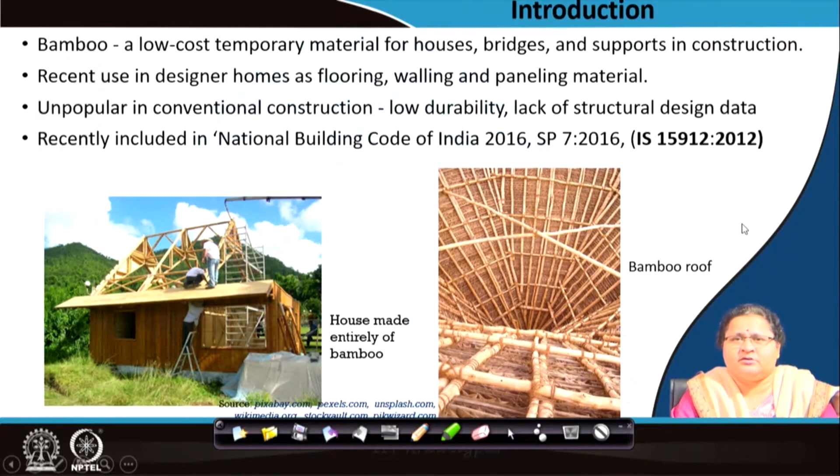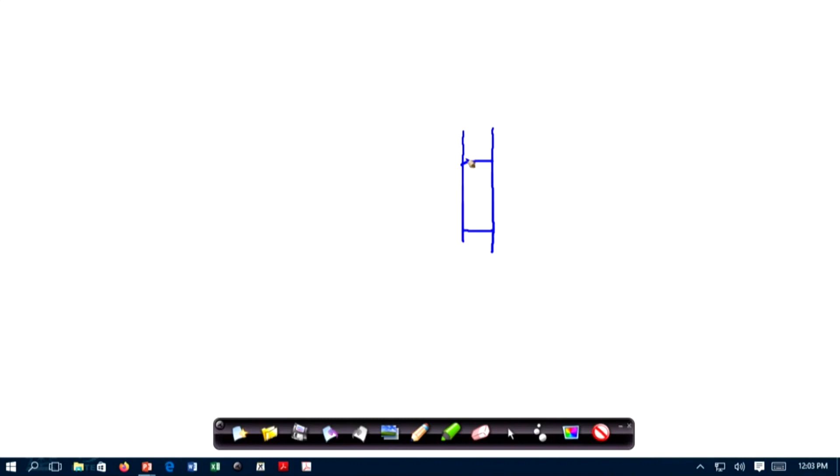So, what does it have? It has internodes and, in the transverse direction, nodes which actually act as stiffeners. So, at a regular interval it has a stiffener kind of thing which gives it support. If you see the bamboo like this, inside here you cannot penetrate further. This is closing, this is connecting. Otherwise it is a hollow section; in section it is hollow. But at these points, these are like ridges.

The bamboo culm is the tubular structure consisting essentially of its nodes and internodes. In the internodes, the cells are axially oriented, similar to wood fiber. The fibers are in the longitudinal direction and the nodes are restraining it in the transverse direction. The disposition of the nodes and the wall thickness of the bamboo are significant in imparting strength to bamboo against bending and crushing.

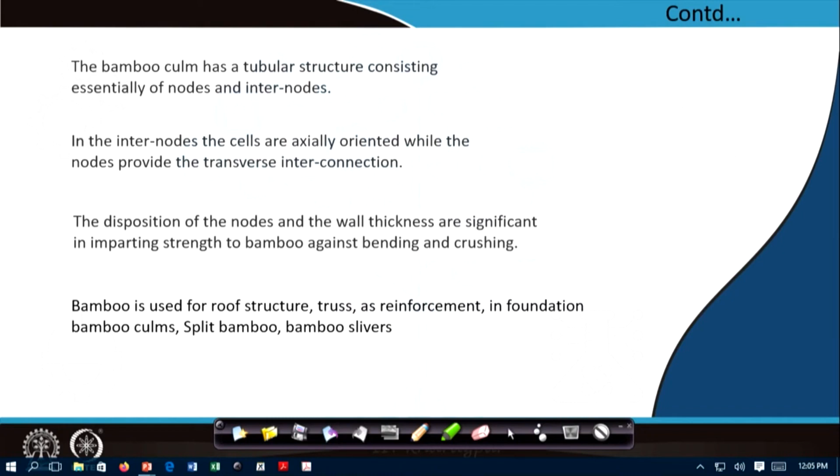Hence, it is suitable as a spanning material. Bamboo can be used as a truss, for roof holding, framework, and tiled roofs. Bamboo can go as a continuous beam member in foundations, and by splitting it, you can make it usable for giving strength.

So, bamboo splits half culms. You can split it in the longitudinal direction. So, it needs proper workmanship. So, you can actually slice it into two halves. I will come to some pictures.

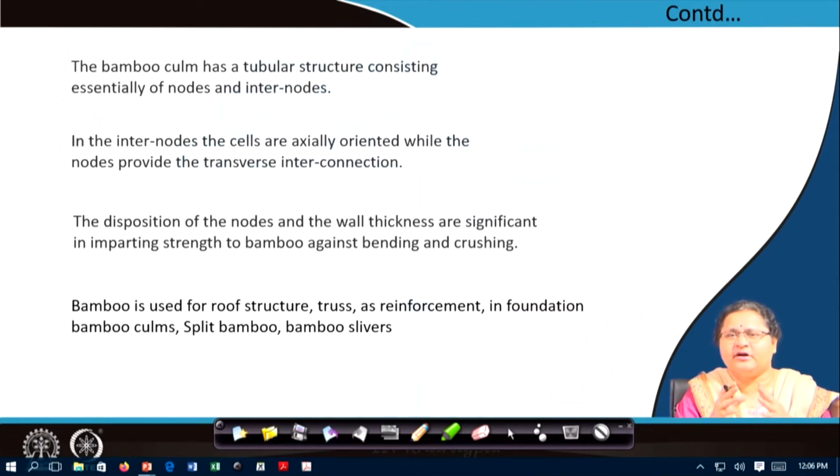And you can slice it further to get slivers. Those are also quite rigid, quite strong, and they can bend. You can make a wall with it, the support system within a wall with it. These are called bamboo slivers. So, after knowing these terminologies, let us see what are the advantages of it.

As I told you, it grows in the longer direction. It is a fast growing grass. It grows 30 centimeters, that means 1 foot, to 1 meter in one day. Extremely strong, natural fiber. Obviously, being natural, it has all the disadvantages like wood, that is, it may be affected by termites, it can absorb water, and you have to check those.

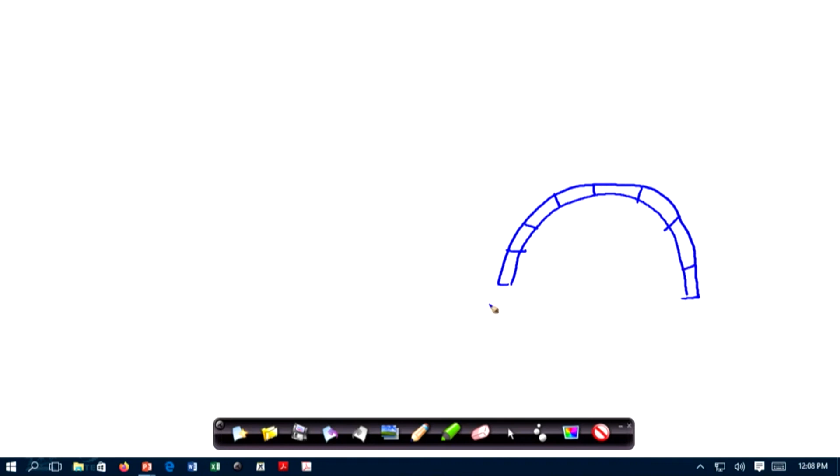So, if you want to make a bamboo arch, you can actually make it by training it. You can create such kind of arch just by giving it a way to grow in this direction and allow it to grow in this direction. After it gets matured, you can cut it and use it for your purpose. So, walls, arches can be made with the help of trained bamboo.

It is a shock absorber, particularly useful for earthquake prone areas. And finally, the most advantage is it is growing, it is a tropical grass, it grows much in number, light in weight, hence it is cost effective. You see, any kind of temporary structure which till date crops up is all made of bamboo. Any festival pandals, any fair kiosks, you will see the extensive use of bamboo.

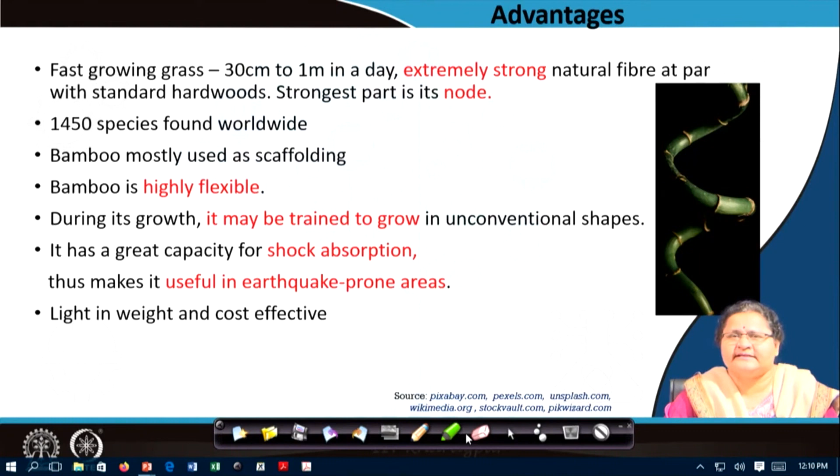As it is light in weight, you can carry it for distances by human carts and they can be transported. You use it as props, for holding, as scaffolding. So, these are the major advantages of it. Now, let us come to the limitations. You can see the red bullet points: joining techniques, flammability, lack of design guidance and codification.

So, traditional joints exist, but they are structurally not efficient, and that is why not put into code, because who takes the responsibility? So, proper joining techniques were to be developed, which are now being developed or researched. Flammability, yes, similar to wood, bamboo is also not fire resistant, they are highly flammable, and you have to either treat it with proper paint or you have to embed it so that it is not exposed to fire, and then only you can use it.

And coming to the last point, it does not have proper codes to be followed as a structural member. Though it is equivalent to wood, it has not come so much into the codes because there is not much design guidance. Embedded bamboo, that is bamboo as a reinforcement, has been started nowadays. Researches are being made, it is being embedded to replace iron rods.

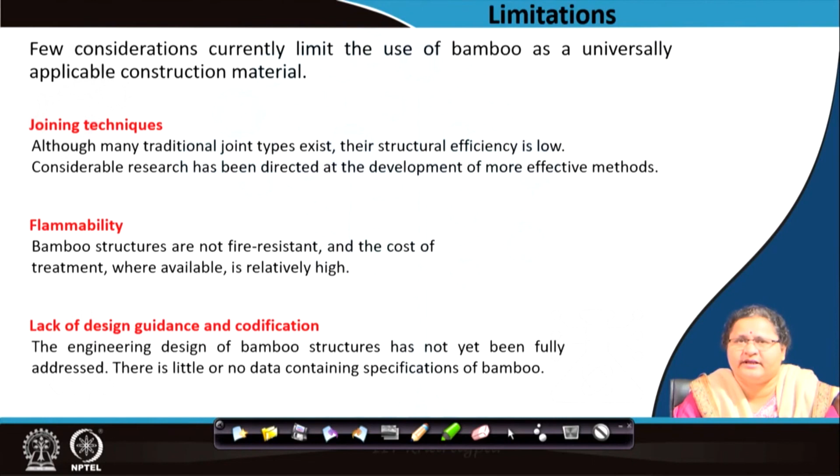Yes, the span may be limited, you cannot go longer. So, lack of guidance has restricted its codification, but yes, researchers are working on it to bring it to the forefront of building construction. So, let us see some joints.

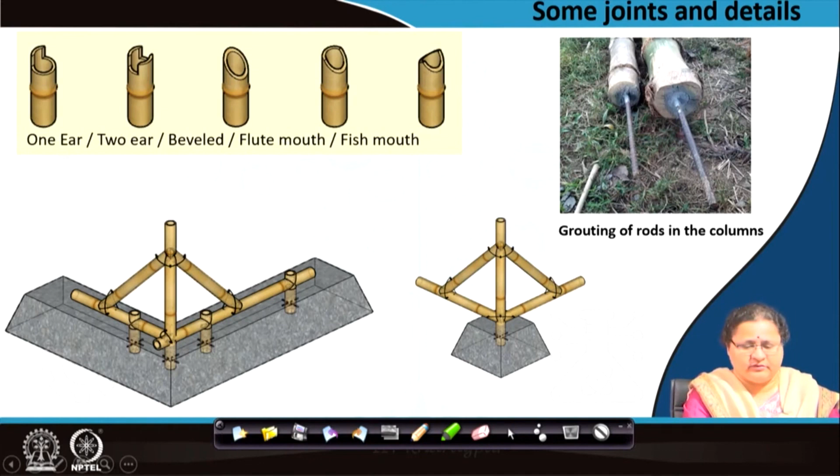These are some cuttings. You can see on the upper side a number of cuttings: 1 ear, 2 ear, bevel that is played at 45 degree, flute like. So, one side is half at the same level, that is a horizontal level, and part of it is beveled, and this one is the most used, which is called fish mouth. So, this is giving a circular profile which can, you can see, sit on top of another

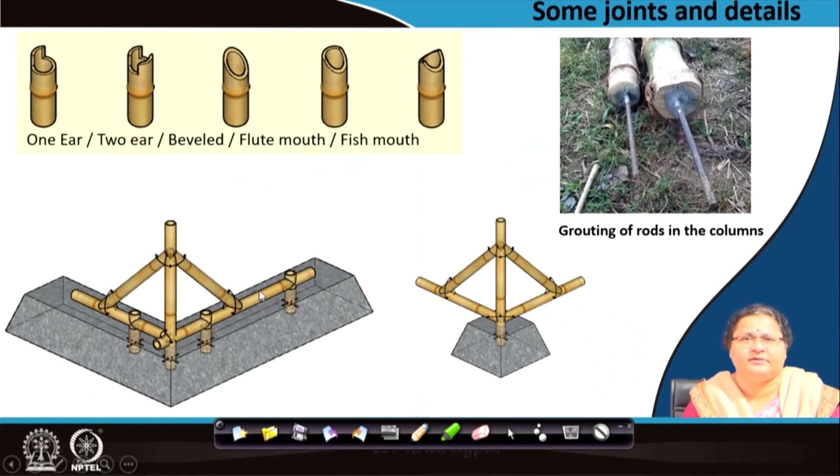member. So, these are composite bamboo concrete foundations. This is a single foundation and this is a strip footing. So, this is a continuous footing that is in the foundation. You can see at the edge or the corner where it is going to take the load, here it is strengthened by more members. So, this is the continuous member, and you see the cuttings are being done.

Now, how to fix it? You see the grouting of rods in the column. You can see reinforcement rod here that can go and get embedded inside the concrete. So, these are details being developed. Architect Laurent Fournier works in Kolkata area, where he has developed this kind of grouting methods. He has made cold storage in the rural area with bamboo. So, experimentations are being done. Let us see some more.

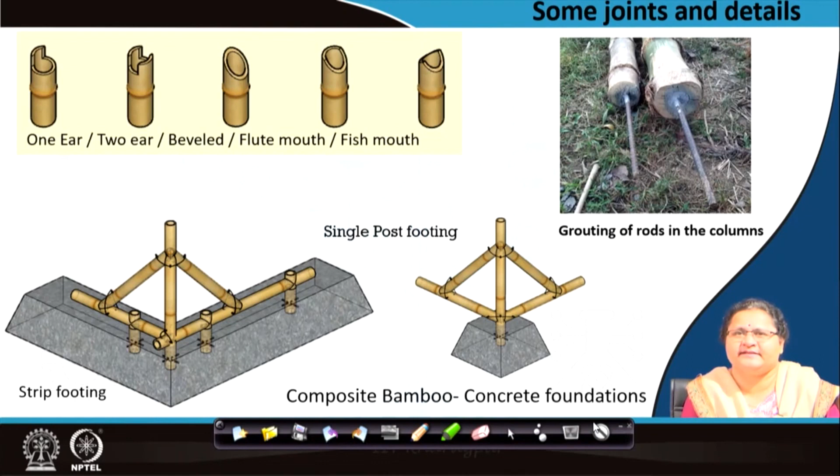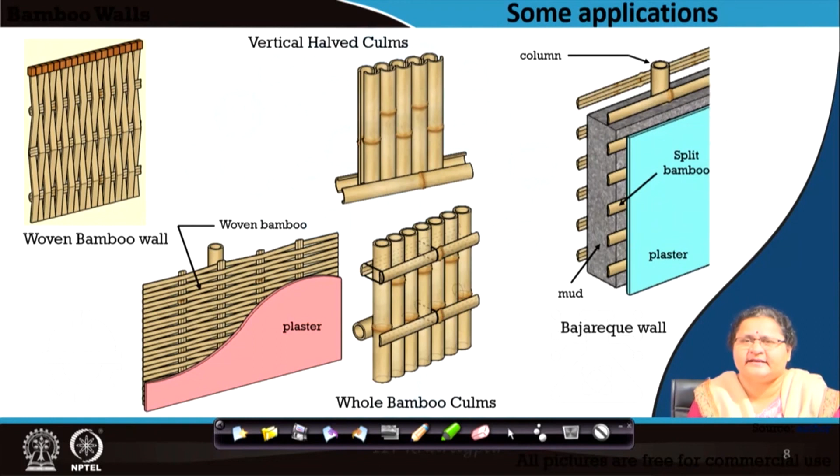So, let me come to the end of this particular module and I leave you with some assignments which consider all the 5 lectures. Few of the questions are from wood, few of the questions are from plywood, engineered wood and the bamboo part. So, you can try all these, hopefully you can answer all these and any questions can be raised in the portal.